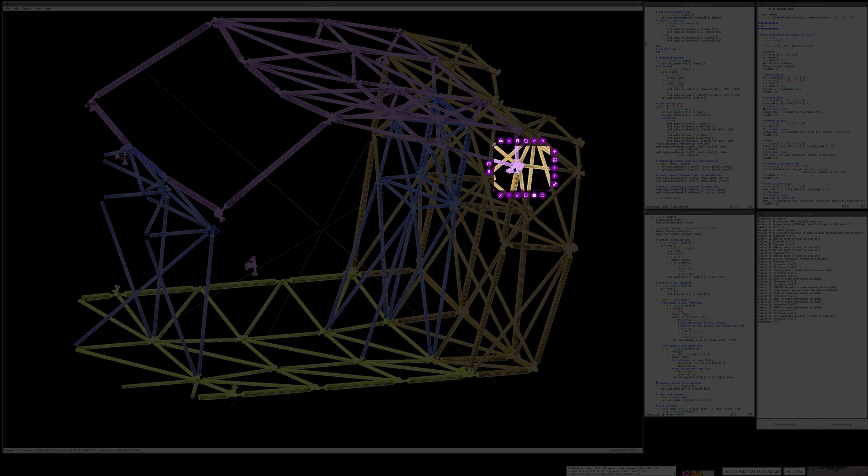A specific location where we have the problem is here. So let's just zoom in on that. And this is part of what's called the back box. The brown is the back box. The purple is the roof section. But

the bits that are not included in the roof section, because those are going to be part of a gull wing door, are these ones and these ones, all of these. So that's where you would step in, and all these parts that I've just highlighted, there and there, will be in a canvas bag where the pipes will be inserted into pockets, hanging down. Here will be a PVC window, just like you get in kit cars. That will do as a temporary thing whilst I work out the rest of the design.

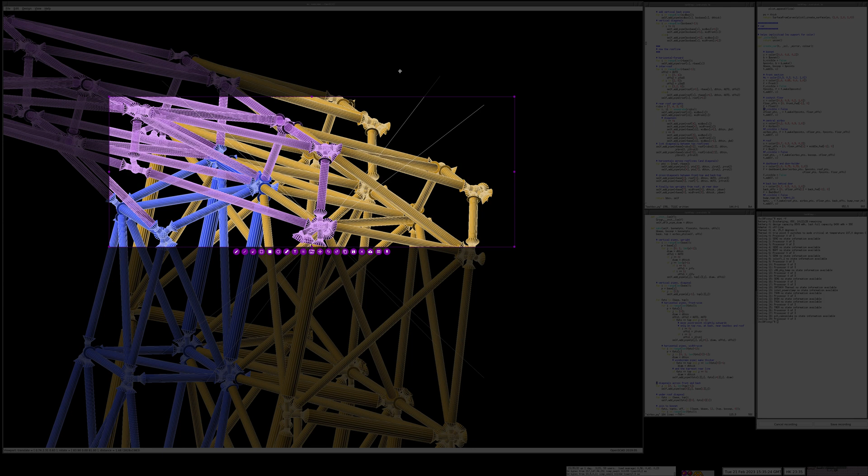So here is the node that is problematic. Let me just escape from that. What has happened is this roof part includes this part here, and obviously on the other side that part there, as a single assembly that must be bolted on, and it has to be bolted on here, here, and there, there, behind that, there, that one, that one, and that one. So quite a lot of bolts.

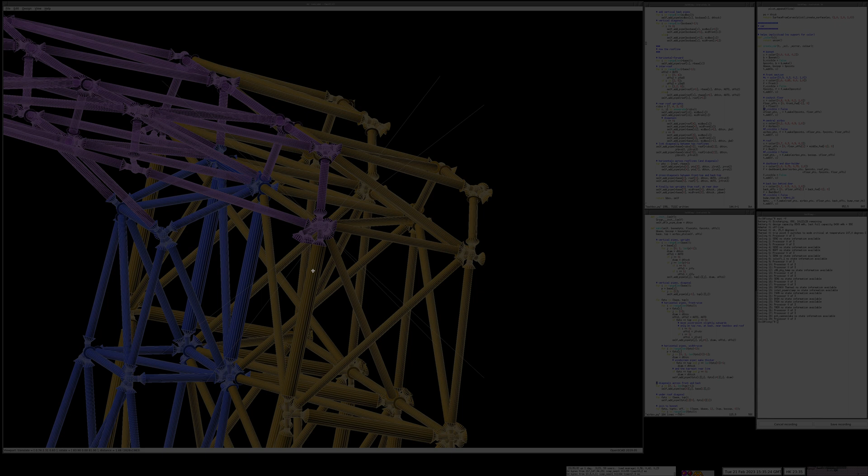But if you look at this, let me just turn it a bit more. How can we get a good angle? Yes, that's a good angle. As these bolts will be in there, there will be a force pulling on this pipe here. But this is only a 15mm bamboo, and so is this one in the middle here. So what's actually needed is for a 21.5mm pipe to go from here to here in the opposite direction.

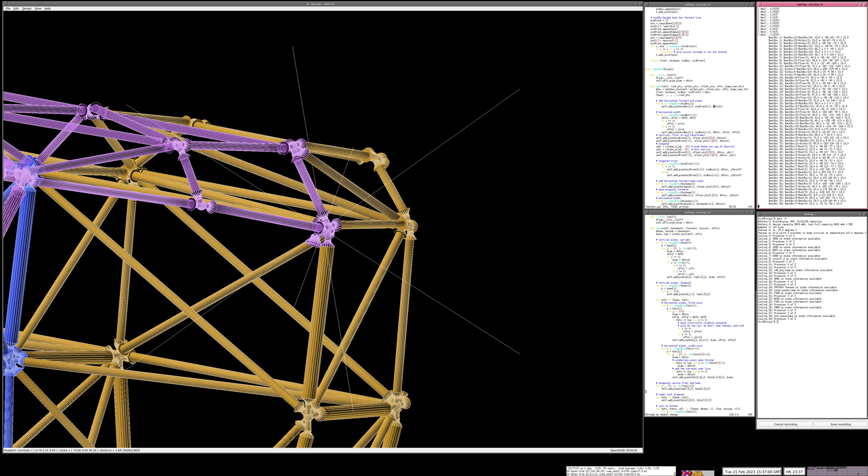Now let me just sort that out. To redo the changes. This one. This is the thing. Save. And watch, this will change to flip. Okay, so now we've got the 21.5mm pipe running across here. And what that results in is diagonalization down to that floor. There's a triangle section here of 21.5mm,

and what I've also done is changed, where are they? Changed this one here, which is inside the back box, and this one, which is also at the top of the back box, but is strictly speaking part of the air box, to also be 21.5mm.

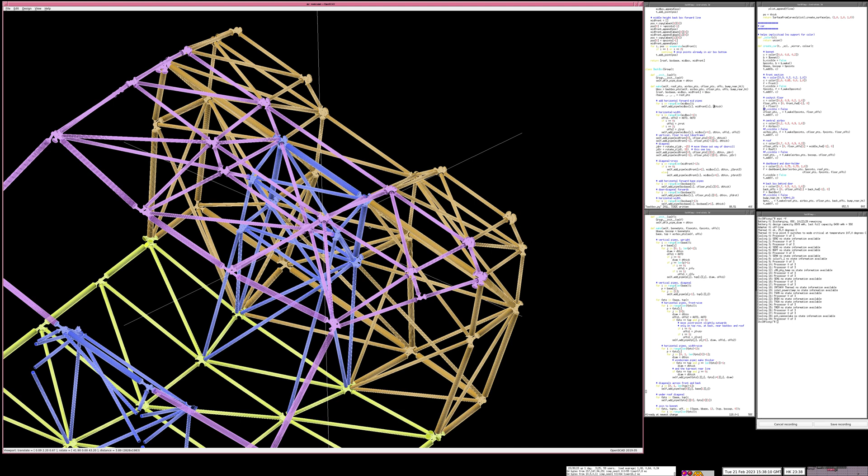Now, because I've already made these up in bamboo, I'm going to take one of the 21.5mm FloPlast pipes, cut a small section out of it along its length, and put it over the bamboo. So the bamboo will be inside because that will be the right length, and then epoxy cloth resin. But this was actually quite important to do, because all of these parts here, you can see the pattern here is also now 21.5mm. That is now 21.5mm. That was already 21.5mm.

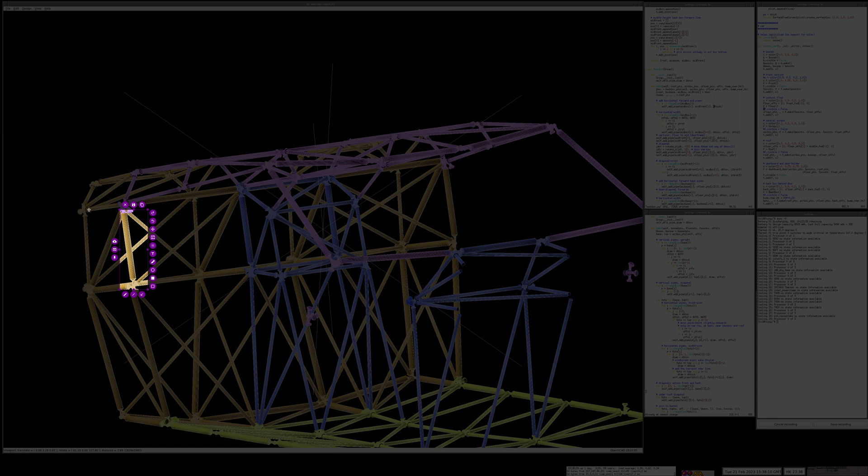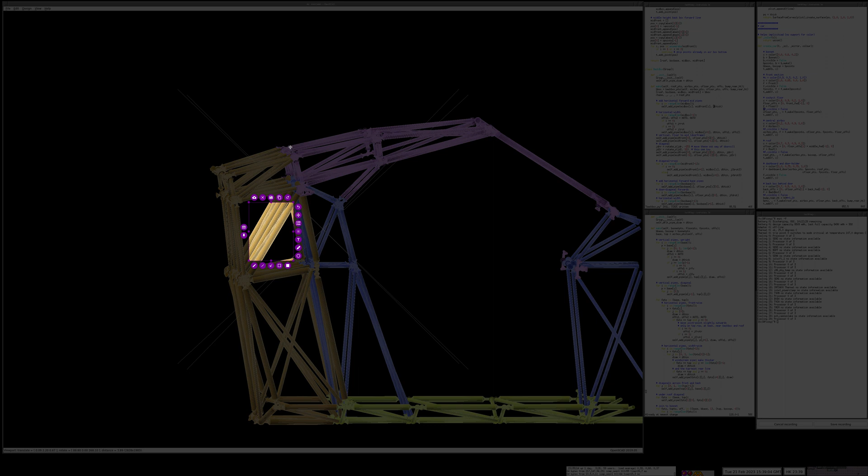So if we do a semi side-on view, let's get it there. You can see, looking side on, that all four of those pipes I've made 21.5, and the reason for that is that these are the points most likely to become seatbelt mount points, which are required under the motorcycle SVA test for heavy quadricycles when using fiberglass or epoxy resin lamination techniques. The inspector is specifically looking for heavy overlay, in particular around seatbelt mount points, to ensure that they don't rip free in a collision.

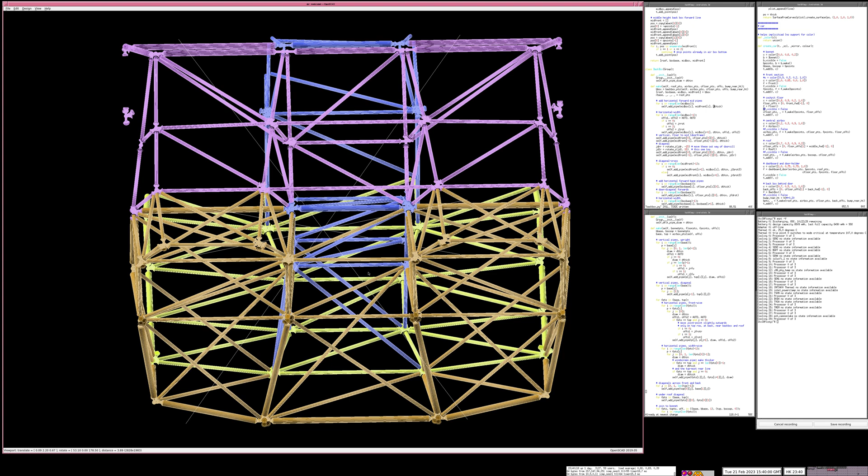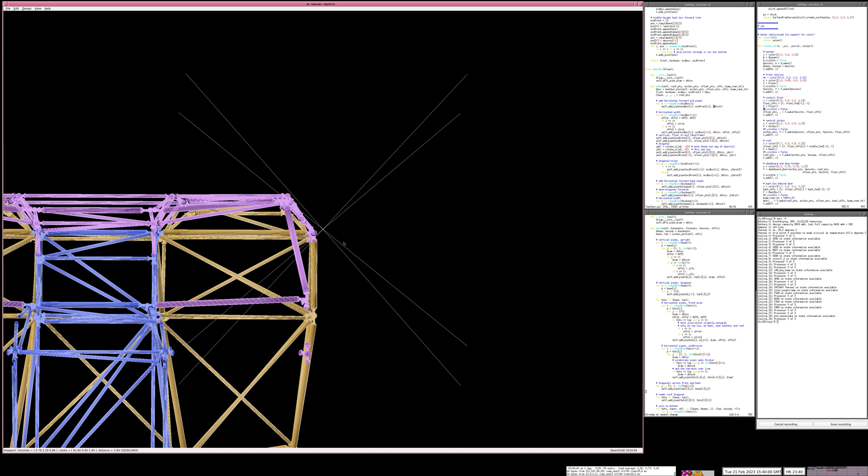So yeah, that's correctable. It's not a big issue. I have a way forward. The current phase I'm at is that I am considering adding the bolts, and I've got M10 bolts and some 1/2 inch or 12.5mm 304 stainless steel tube, which I will cut into 30mm lengths,

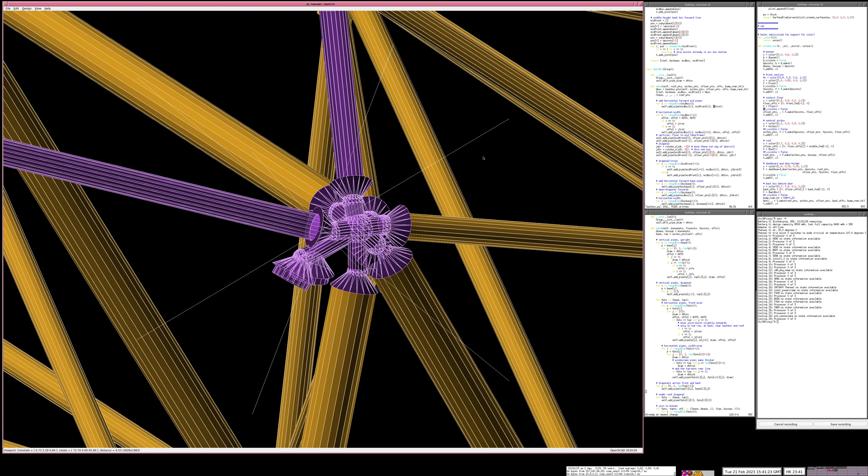and one of the lengths will be epoxy wrapped onto one part of the frame, and the other onto here, with the M10 bolt locked tight between both parts, such that when all of those M10 bolts are epoxied in, everything will be in position already, so there's no risk that I end up epoxying one bolt in incorrectly, finding there's a gap or it's in the wrong place, and having to cut it loose and start again, which would not be very good.

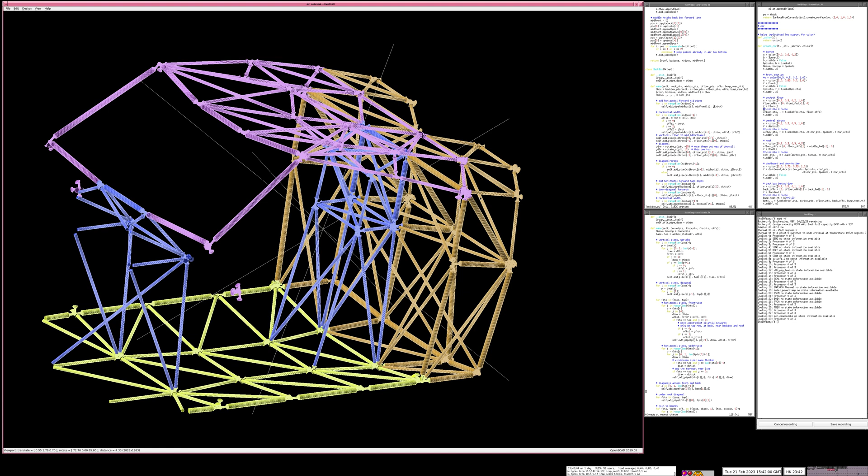So I can't take out any of the M10 bolts until 7 days, when the Sicomin SR5550 resin completely cures. It's quite a fascinating thing doing this. Little details, so I'm learning along the way, really enjoying it. But